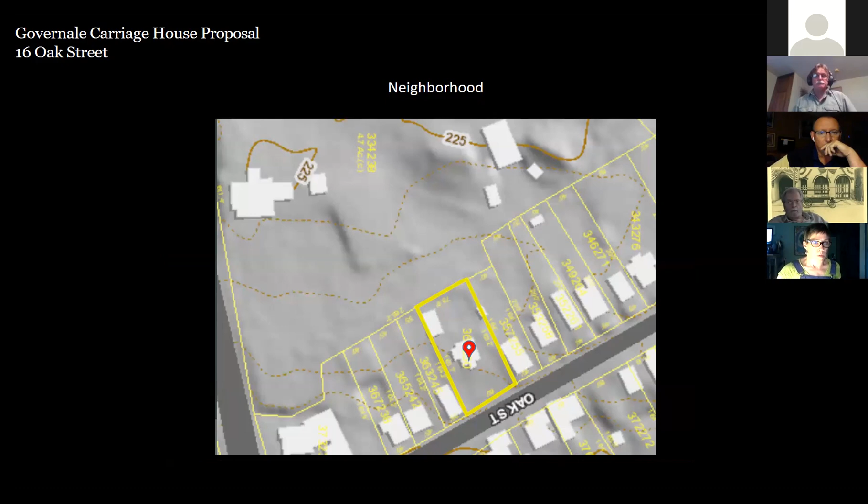I wanted to share with you the neighborhood context. As you can see, the positions of the houses and the structures on the neighboring properties here. The schoolhouse is notated with the red pin, just so you have an idea of where the structures are situated.

I would like to share with you design details that include the lighting, the siding, the garage doors, the color of the structure, and the plantings as well.

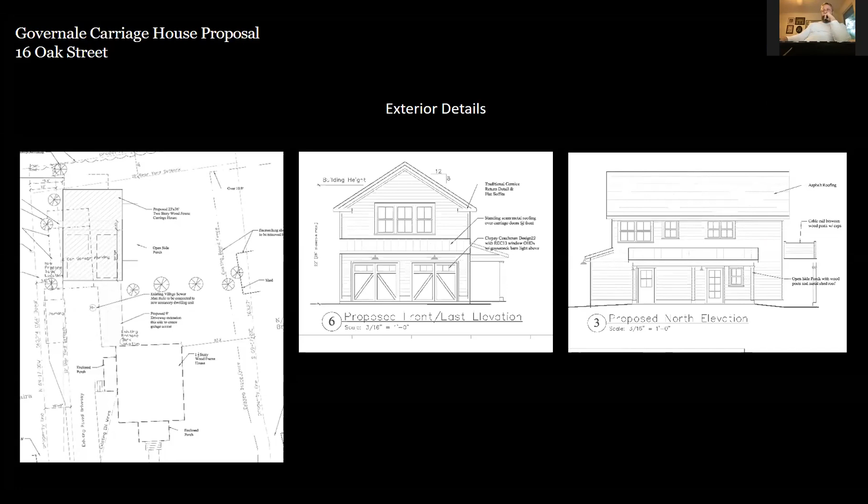I think that you can see the plan pretty well. In the middle of the property, as a screen between this structure and the schoolhouse, there would be a screen of birch trees. At the south corner of the garage, I envision planting lilac, and along the south side, more lilacs and/or several bayberry shrubs.

Is that smooth Hardie board? That is the smooth Hardie board. Okay.

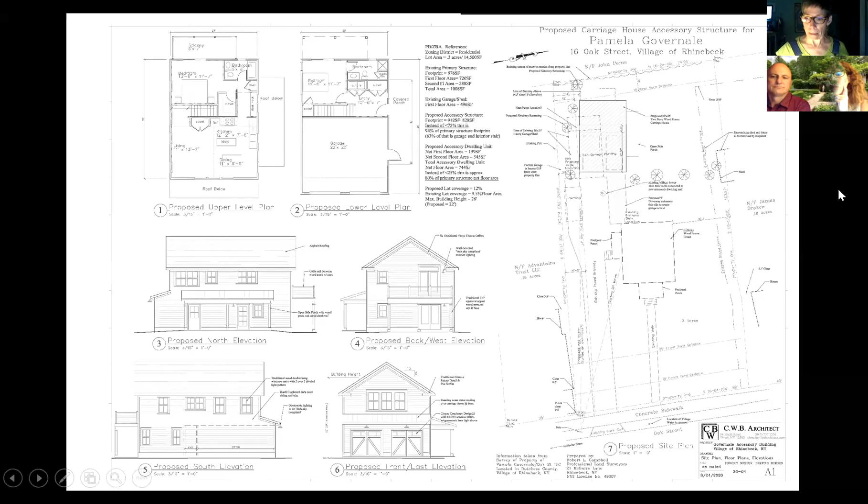John Fenton had a question about the propane tank. So is this their new location?

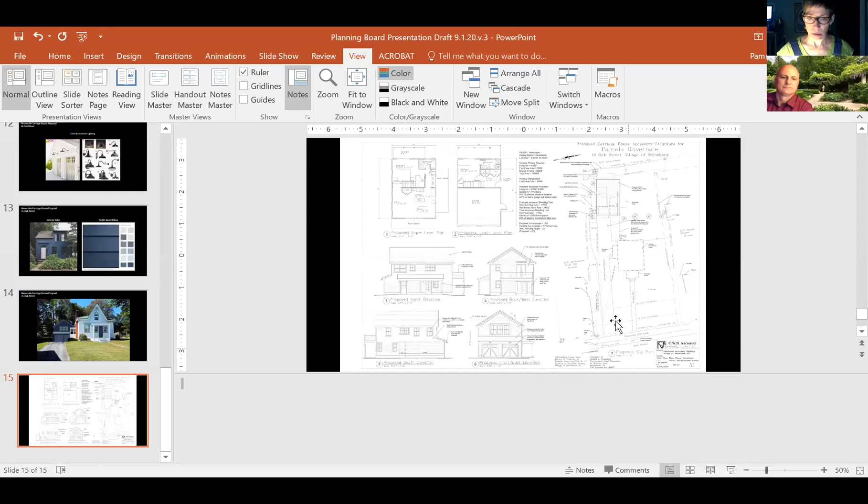Oh, did you stop sharing, Pamela? Sorry, I don't know what I just did. I can share, let me fix that. See if you can zoom in on that one section. It says I can't share while you're sharing. Oh, let me just fix this, sorry. Can you see the screen now? Can you see it? Yeah, that's the screen. We just got to zoom in a little bit. Can you zoom in, Pamela?

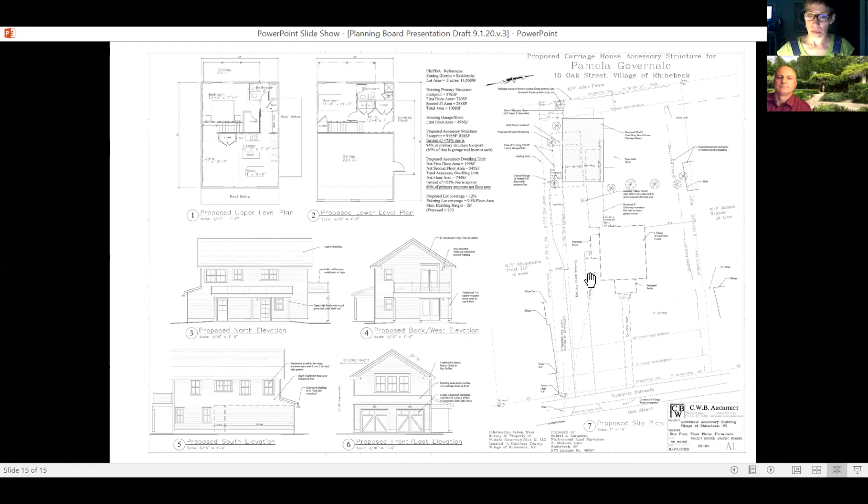Zoom in on the image on the right. Is that the idea? Yeah, on the right, the actual site plan itself, the parcel, and then go to the accessory unit. The accessory unit has, you can pull that down a little bit. It's got a propane section right there, right where, yep.

And so that there is within the setback. And that was our concern. It is part of the utilities, which is attached to the structure, which is then considered part of the structure.

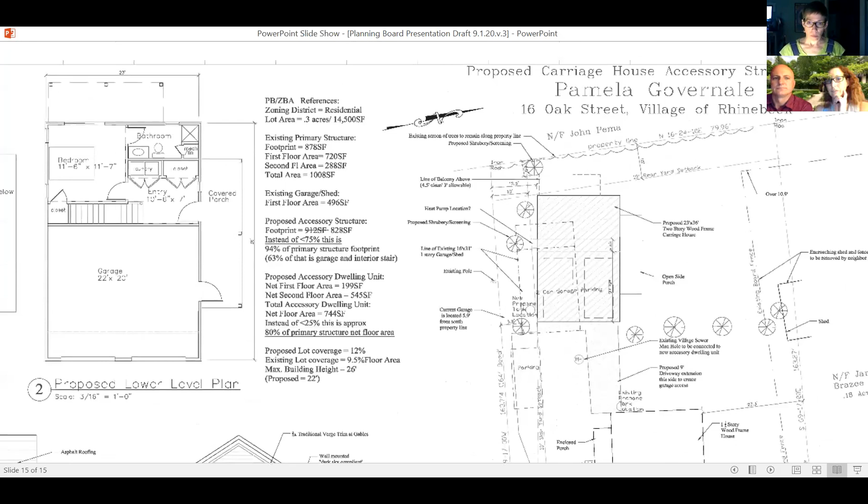Tim Decker mentioned it, but I thought if it was underground, it wouldn't have been a problem, but these are above ground. So we thought that those units, those supply tanks, would be moved further west. And you have some room in the back. You just have to run a longer line.

Yeah, yeah, that sounds fine. Is everybody on the same page? Yeah, yep, okay. I thought it was being moved towards the back where there was some additional space.

I thought that the propane tank was allowed to be in the setback and it was just the mechanical system itself, the compressor, that had to be not in the setback, but that's fine. If the propane needs to be not in the setback, we can slide it further back. That's how we've been doing it, Christy, past practice, anything within that setback, southwest corner.

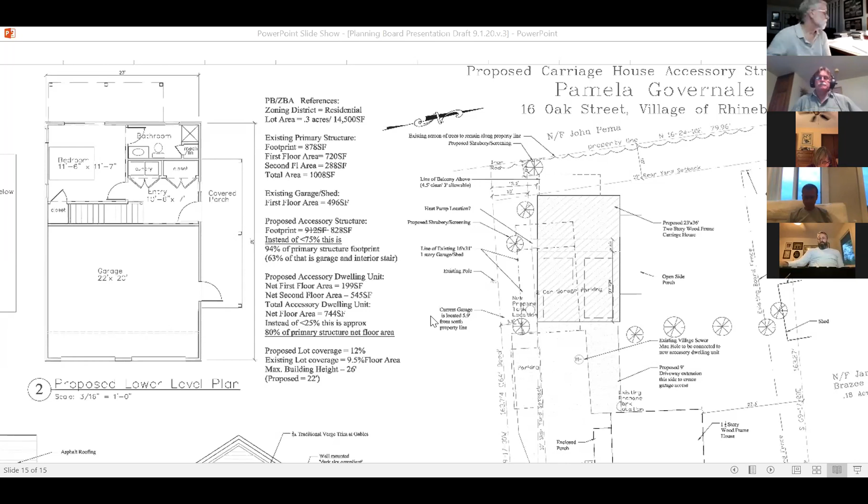Okay, so let's continue. Now, the windows, are the windows all good? They're all vertical versus horizontal? There's some windows that are doubles and triples. Are those okay? Those are all double hung windows, they're all vertical orientation. Yeah.

The building looks great. I mean, my only difficulty from the get-go was the mass of it. And you got the variance from the zoning board, ZBA, so no comments on that. You moved it away from the setback, so I don't have any problems with anything. In fact, I think it's a very nice looking building. It is.

I just wish that the house that it's adjoining was bigger. That's moot now. So does anyone have any other comments on this?

I'd just like to say that the presentation was really good in terms of the photoshops showing where the neighboring houses were, the tree canopy, and the colors. It was very thorough, and I wish everybody would be this methodical and well prepared.

Well, we don't require people to hire architects and engineers. Some people come in with pencil drawings, and that's acceptable. But this was a nice presentation. That was all Pamela, I only did this one page.

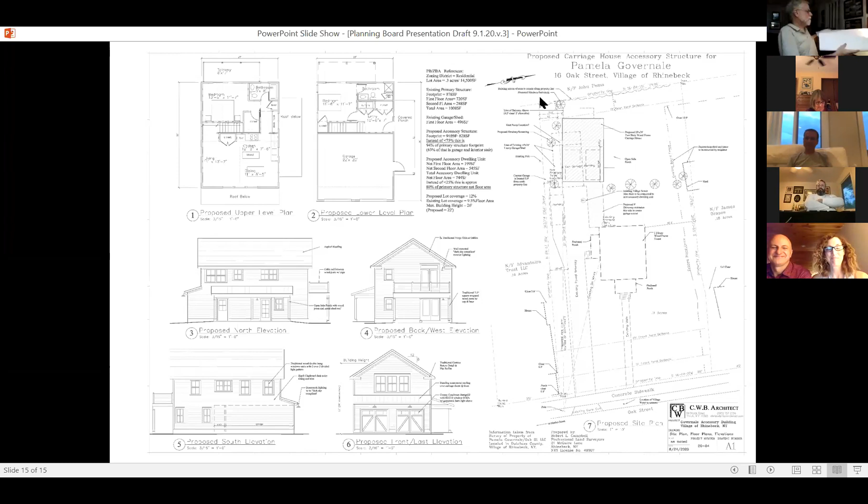6378 Mill Street. Now, I had queued up a couple of those things. I don't know if Brian can let me share, or if the Beck people have photos they could share, or if not, I can share them. Aaron? Yep, Ryan, I do have them. I'm simultaneously on my phone and on the computer, so I just have to get on the computer and then I can share my screen if you don't have them handy.

Okay, let me see if I can join real quickly, and then I should be able to share my screen. Okay, I have the functionality to share. Yes, okay. Okay, so here, can you guys see? I think you got to activate your video, Aaron. Well, I don't have it, there's no camera here. I need the video to activate the computer. I shouldn't need it to be able to share. All right, just try to share your screen then. Oh, it was here, how about this? There we go, we're here. That's good, good. Technology.

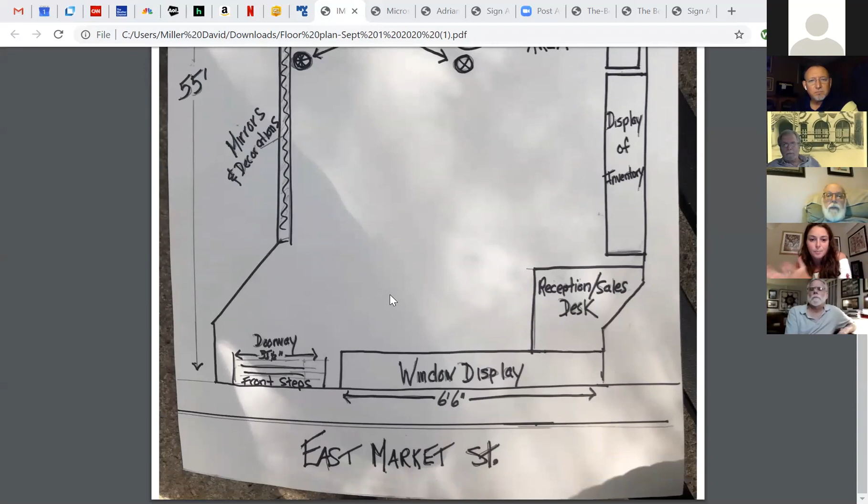Well, I guess it's lovely to meet you all. I wish that we could be doing this in person, but we are. I guess I'll start by telling you all a little bit about myself. I was born and raised in the Hudson Valley. For the last 9 years, I've been in New York City, where I studied fashion.

I did work for Vera Wang. I'm not sure if you're familiar with her, but she's one of the more popular wedding designers. So I worked for her for 5 years. And then I did some production work where I gained relationships with manufacturers and different designers. So now I'm back here.

COVID has brought me back to my roots. And I've kind of always wanted to do something on my own. And this is kind of where I'm at right now. It just kind of fell into place for me. And I do have a lot of relationships with designers still that I gained through those 9 years of being in the city. I know right now there are no other independent bridal boutiques in Rhinebeck.

And the one across the street went out of business, yep. So, you know, the Hudson Valley is booming in terms of venues, and I think Rhinebeck can really be a one-stop shop with makeup artists, venues, and everything. And now having somewhere where you can go and get a gown as well could really be something that the village will benefit from.

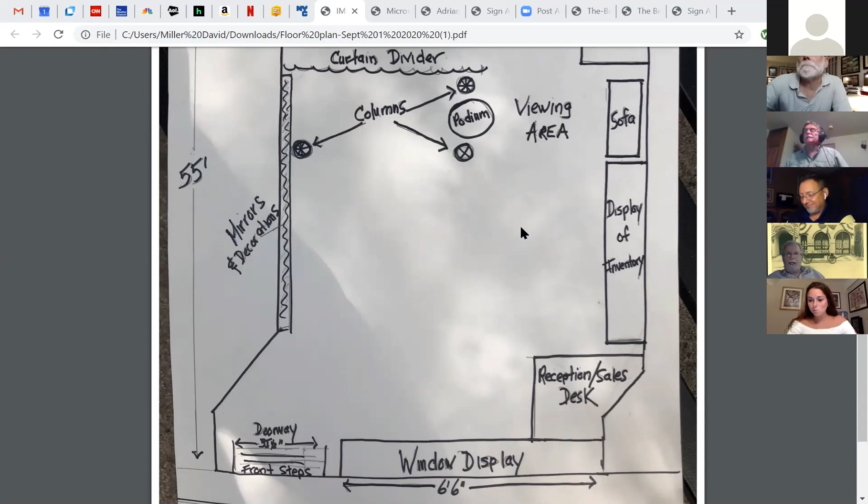The next thing is 108 Market. Now I don't know whether I have that - Warren, does Warren have those plans? Well, they put in the steps and they took down the louvers on the side porch. Right, so I can show you the plans again that we showed you at the last meeting.

You want me to do that now, share the screen? Yeah, I guess we have a technical problem with the internet at Village Hall. Let me see if I can find it here. Hang on, it's not working. Can you see the screen? No, not yet. All right, I have to click the green button - let me go back to the Zoom meeting. It's not showing that.

Come on... For some reason I'm just seeing David Miller, but the Zoom application isn't coming up again. Figure out what's going on here. I don't know, I had a problem bringing it up - having it on my email wasn't good enough. I had to save it on the desktop, and then when I tried to share it, then it was there and I could share it. I could try - for some reason I'm seeing David, and then I saw Mary briefly, but I'm not seeing the whole Zoom screen.